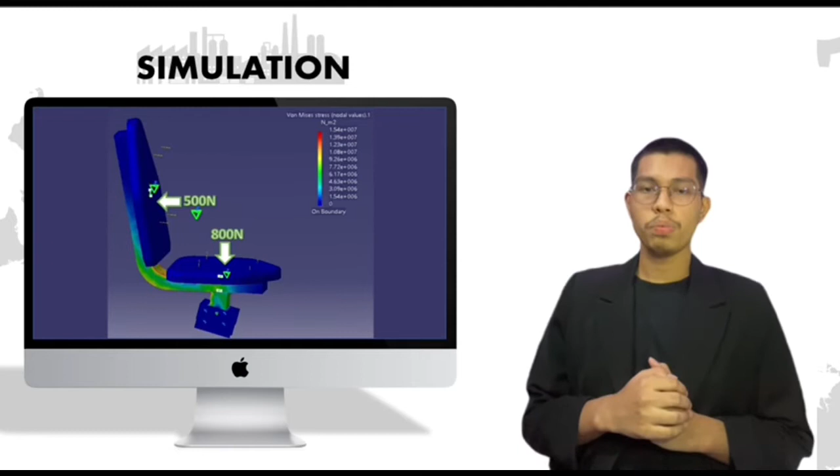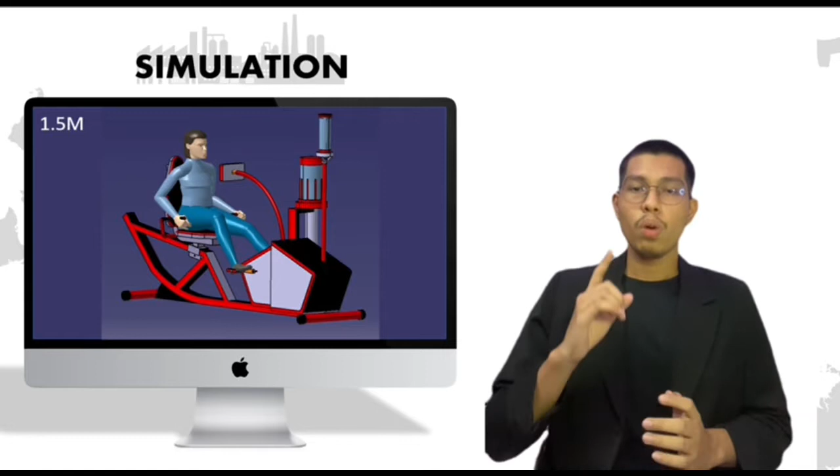Second analysis is more on human analysis. It analyzes the suitability of human height compared to XLR8. This seat can be adjusted on the frame according to human height. For this simulation, we categorize into 3 adjustment positions: the first position at 1.5 meter or 1500 millimeter tall, next at 1.7 meter tall, and 1.9 meter tall.

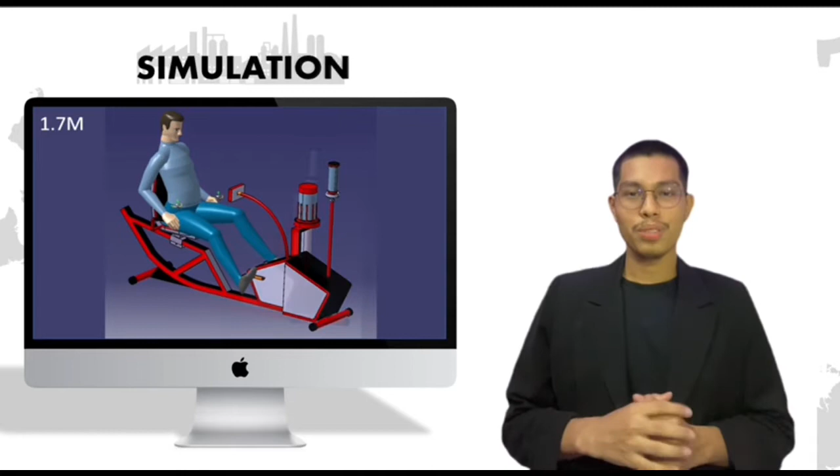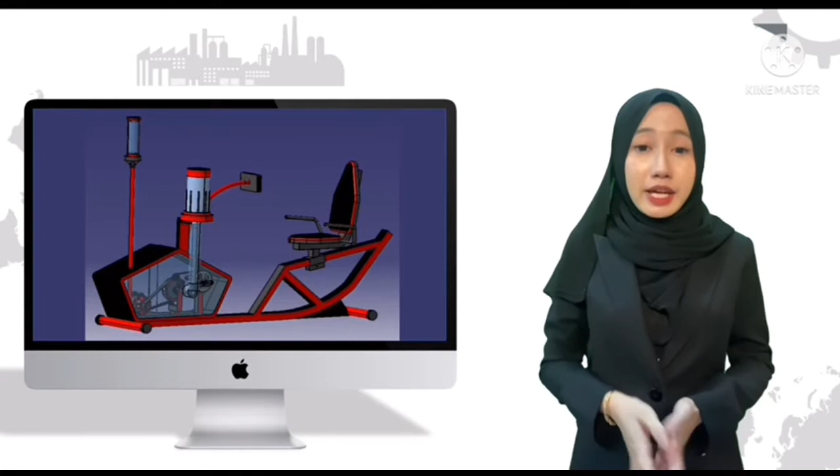So let us hear the explanation from Elisa. To you, Elisa. Hello, my name is Elisa, the team leader for body frame, and I will be explaining the body parts in this project. Since we know that all things in this world may have a main part for each object that exists, body is the main thing in this project.

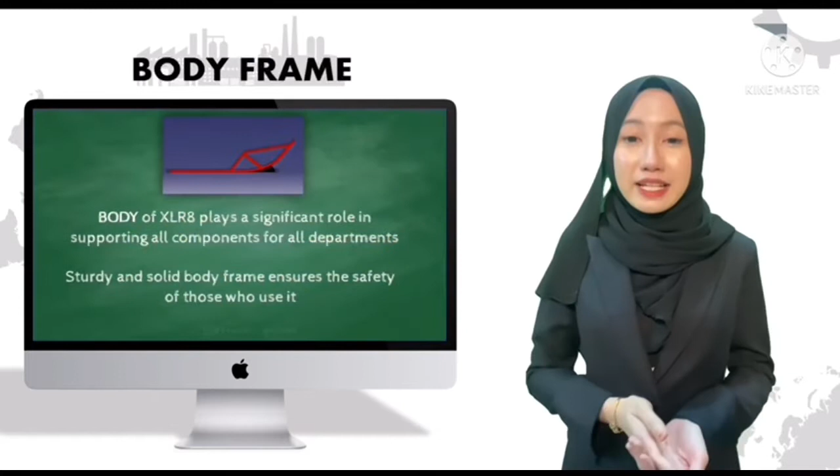Why is it important? Let us have a look. The body of XLR8 plays a significant role in supporting all components for all departments. The fundamental aim of a sturdy and solid body frame is to keep the people who use it safe. So, how can we ensure that people can use the body frame safely? It is not as easy as you assume.

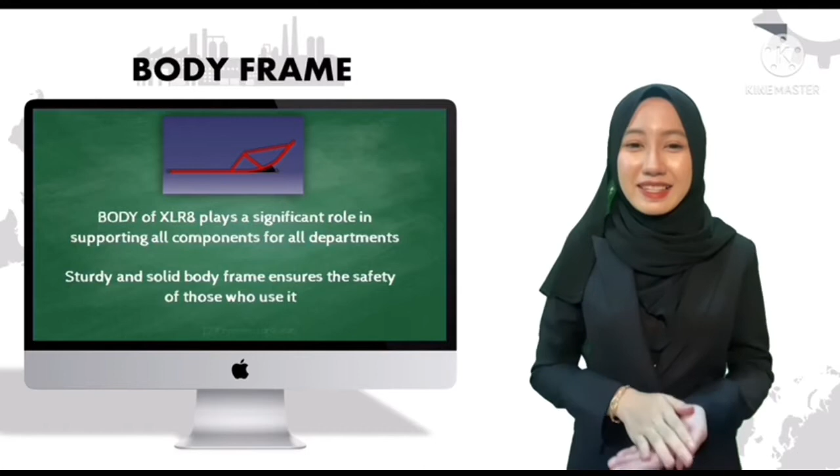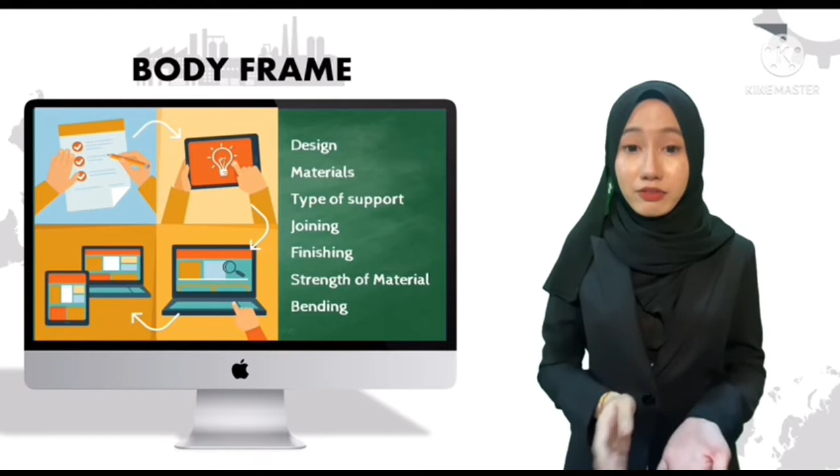We perform a lot of study on the design, material use, and the type of support, and we also go through every single detail that you might never think about. We desire the highest quality for all of our users' needs. That is why we only want the best.

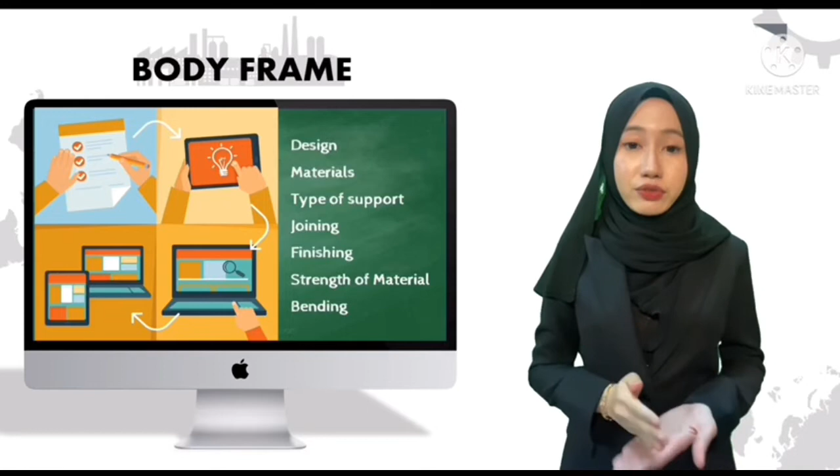Because of the properties of the material and the strength of the joining, we choose mild steel and gas metal arc welding as the primary joining. Instead of using mild steel for the whole body frame, we use aluminium for some parts to reduce the weight. In order to prevent corrosion, we also utilize high-quality spray paint for the finishing. And acrylic sheet was used as the cover for the gearing system.

Besides, those metal materials are permanent materials that can be infinitely recycled with no quality degradation. That meets the main purpose of the sustainable development goals. The body frame was designed to be user-friendly and set to a suitable length and height so that users generally ranging from different age groups could use it.

Since our target users are from elementary until high educational level, we make sure XLR8 is suitable and practical. We will ensure that our users understand the objective of our innovation, which is learning tools as our goal. So, how does the XLR8 body assist our targets?

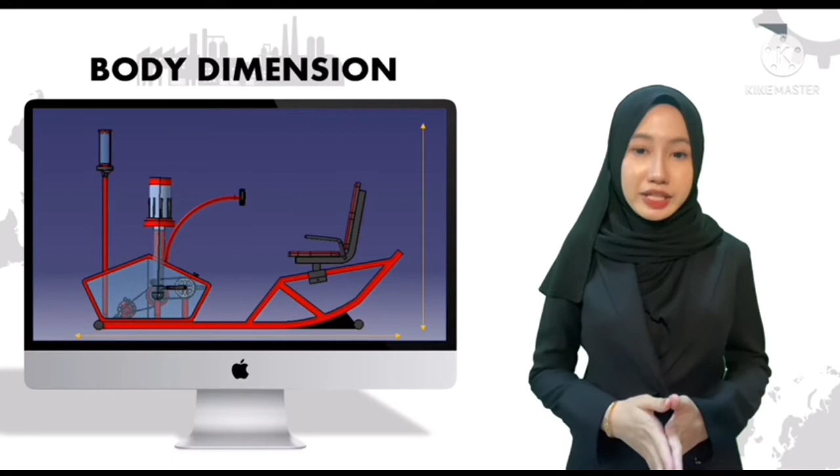Our critical role is to ensure that the students can observe the gearing system changing. We cover the gearing system with a see-through acrylic sheet so that students may easily understand and experience gear shifting and energy conversions. For maintenance, the acrylic sheet may also be opened.

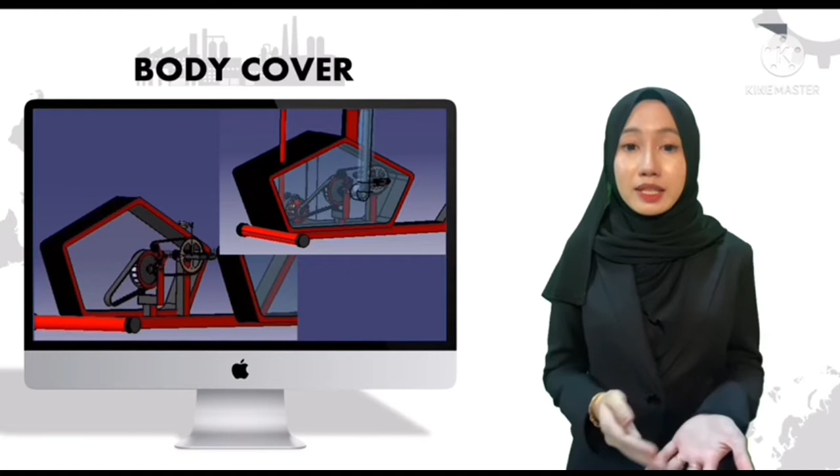Since we have an obstacle in doing this physically due to the pandemic, we did our best to demonstrate that the design we created was well suited to our purposes. We use CATIA simulations to determine the best decision for our users. This is the first body design that we did, and let us proceed to the simulations.

We can see there is a deformation happening in this body frame after applying 80 kg weight in factor 1 condition.

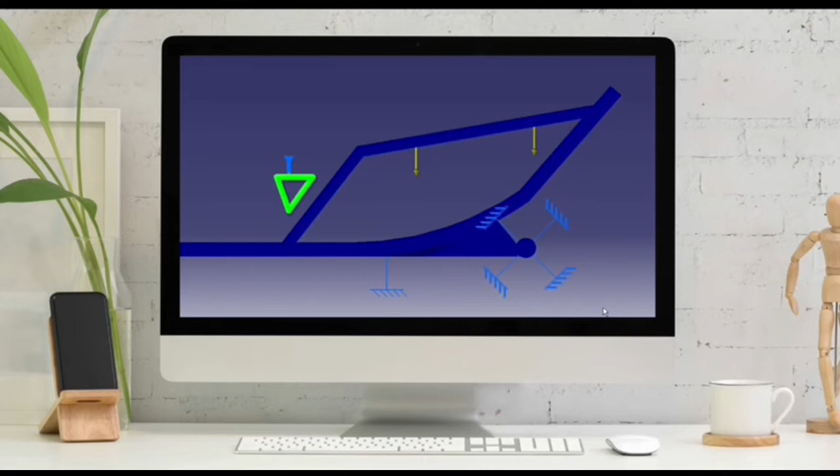Next is von Mises stress. Yielding might happen in a real situation. We can clearly see the translational displacement effect on the body frame after force is applied.

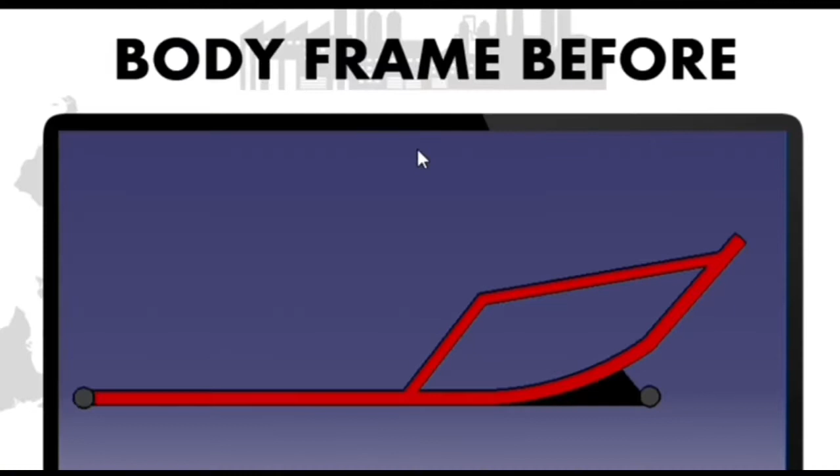We know that we need to enhance the design after running the test to overcome this problem. This is one of the designs we created to upgrade. However, after taking into account the cost, the material utilized, and the weight, we did not consider it the ideal design for a body frame.

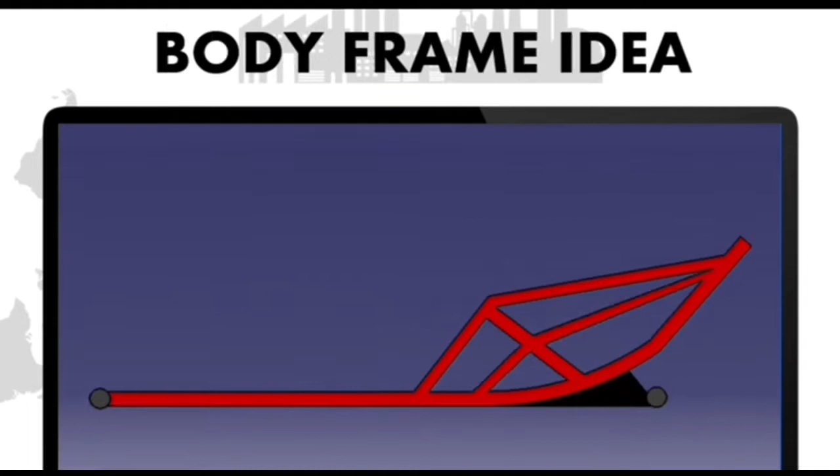Now, this is the final design we chose as our body frame. Let us take a look at the simulation. We can see the difference between the first body frame design and the latest one. In real life situation, the factor used in simulation was factor 1. You can barely see the difference happening after force is applied compared to the old design.

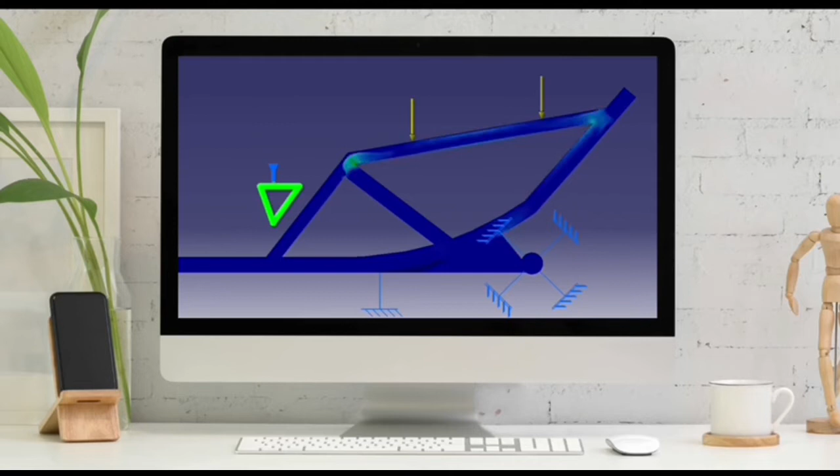Thank you, Elisa. We have already given our best to accomplish this project, from the tiniest to the biggest detail, to ensure user safety. This is always our first priority, to assure the safety of this project.

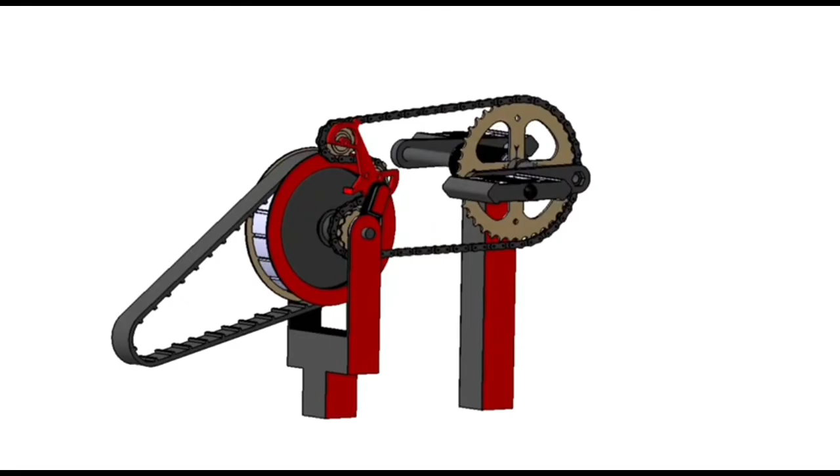Thank you, Shafiq. Hi, I am Amirullah and I am the lead of gear system design for our product XLR8. Now I am going to present and show our product design gear system. To begin with, let us have a look at the gear system configuration.

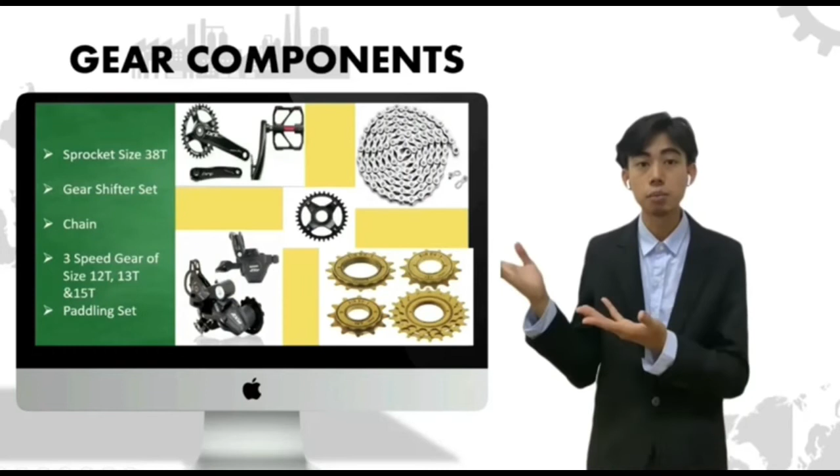As we can see, the gear system consists of a sprocket size 38 teeth, 3-speed gear of size 12, 13 and 15, gear shifter, chain and pedaling set. This gearing system's parts are basically the same as a bicycle gear system in terms of component use and material. Thus, all these components are available at bicycle spare parts stores and easy to get for installation.

Some might wonder, why do we implement a 3-speed gear? The relevance of using a 3-speed gear is to educate or show the mechanical motion of each gear, precisely its rotation, and how the gear shifter works to locate the chain between gear sizes 12, 13 and 15.

While the gear ratio of speed gear size 13 is 2.92, and for speed gear size 15 it is 2.53. The conclusion that can be made from the data is that as the gear ratio decreases, the output speed will decrease.

How can we do the observation? What is the clear change that we can actually see? In order to portray a clear observation, we implement two output devices, which are water vortex and generator.

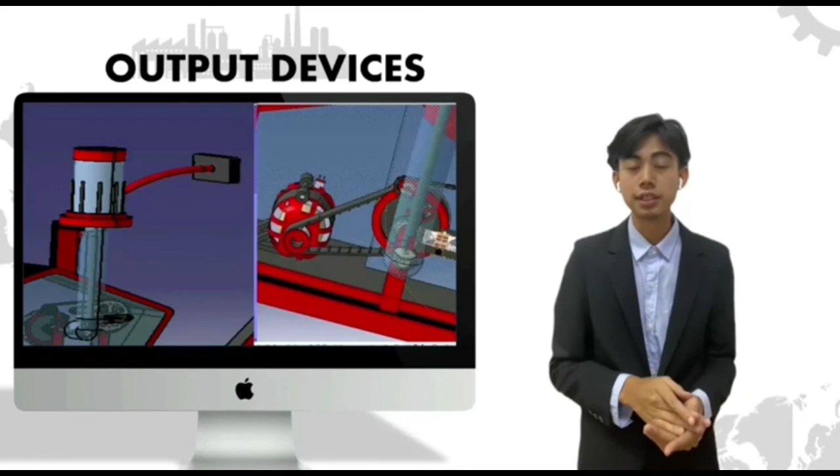The modification we did to the gearing system is that the output shaft will rotate at the same speed as the speed gear and will be transferred to water vortex and generator motion. Theoretically, the output speed varies with the gear ratio produced for each gear speed size.

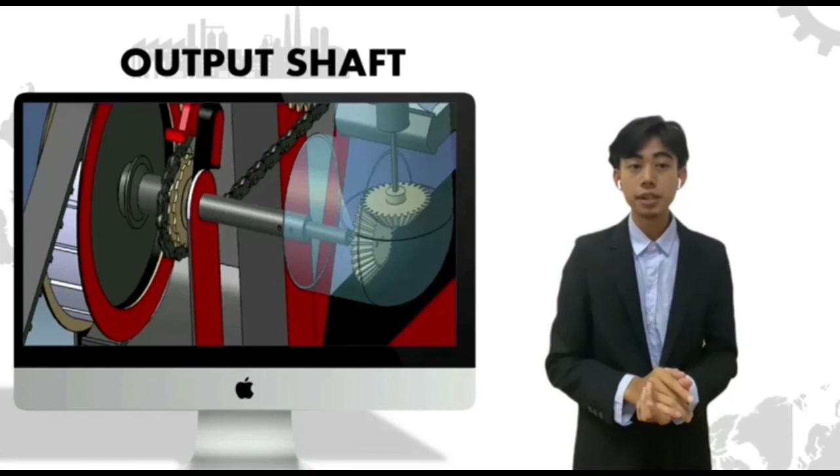So, we have three alternative gear sizes to create different gear ratios, and also to vary the output to be monitored. A few simulations have been run to ensure that the gearing system works flawlessly.